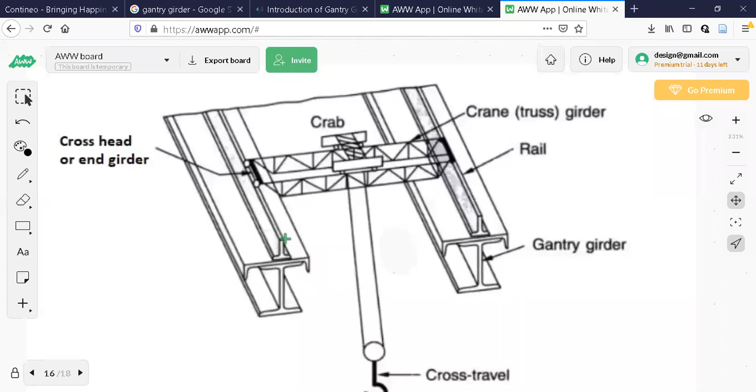Now if you see this, it looks very complicated, but as far as design is concerned, I'll take you back to that diagram. One more diagram is there. See this one. This gives a simpler way of understanding this.

Now if you see this diagram, you will understand how it works actually. You can see these two are, see one is this one, and one more is this one. There are two gantry girders like this, running in this way.

Whatever truss you are seeing, it is the crane girder, and there are two wheels for the crane girder. These are the two wheels through which the reaction from the crane girder is transferred to the gantry girder. This is a simpler way of understanding, because this diagram looks very complicated.

But actually when you go to the industry you see these gantry girders, because as you know every industry will have so many gantry girders. This looks a little complicated unless you go and see it physically. But as far as design is concerned, you can depend on this diagram to understand what is what here.

So you can see this one. Whatever rail and all I was telling you, you can see the profile. The profile of the gantry girder is one channel and one I-section. All are available in the steel tables.

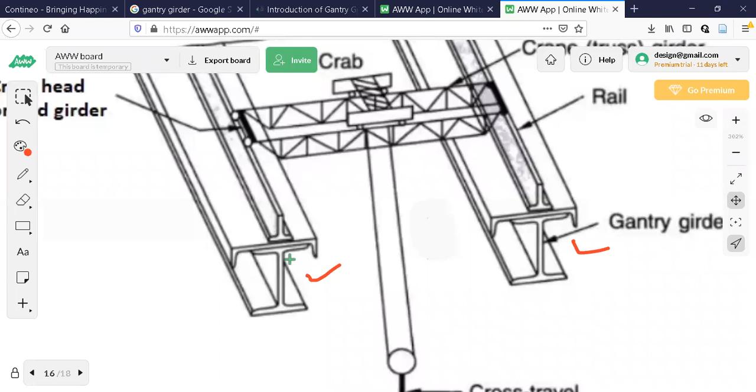Now you can see the rail. Whatever I was telling, the weight of the rail is 0.3 kilonewton per meter, and all I was discussing. That is nothing but this one. This is the rail on which...

See, on which you can see the weight of the rail is also taken, and you can see those point loads, whatever I was telling. The reaction is converted into 2 point loads. RA is equal to RA by 2, RA by 2, through these two wheels those 2 point loads are transferred.

We have to check for what position of these two wheels, because it is moving in this direction. As you can see in this diagram here, you can observe this one.

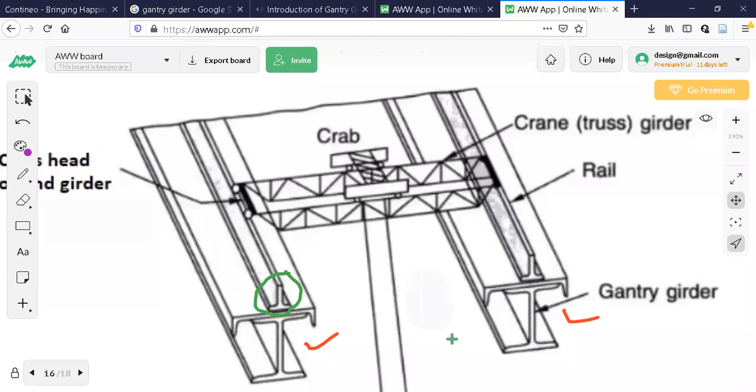You can see this diagram here. Now this crane girder is moving. You can see how it moves in this direction as well as in this direction.

And the crab, that is this one, moves like this or like this also. It can move in either direction like this.

So now what I did was find at what position of the crane girder we get maximum bending moment. That was found using the influence line diagram only. Whatever I have given, that concept is the same for every problem.

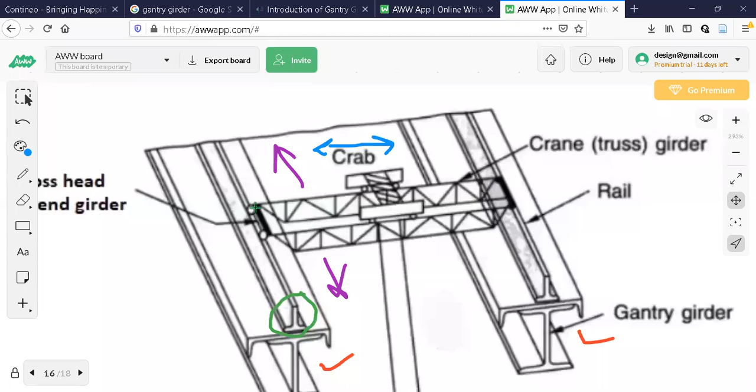And for what position of these two wheels, where I should place these two wheels of the crane girder so that I can get maximum shear force. So it is very simple.

If you have studied influence line diagrams, directly one of the loads, one of the wheels, should be directly resting on the end of the gantry girder, the starting point of the gantry girder. Then only I'll get maximum shear force.

And at some other position, which I discussed yesterday, at some other position of these 2 point loads, I am getting maximum bending moment. Since this crane girder is moving continuously, that side and this side, we have to identify a critical location where the bending moment is maximum.

For that bending moment only, I have to design the gantry girder. Again, you have to locate the critical position where shear force is maximum, because these loads are not stationary, the crane girder is moving to and fro here.

Let us go back to yesterday's class here. Observe this one here.

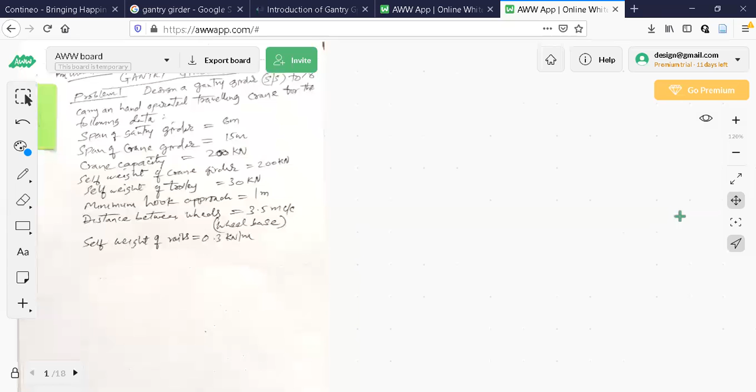I'll just go through this previous, yesterday's class. In 10 minutes, I'll try to cover this one. You can observe this here. See, this was the problem. Once again, I'll go through this.

Design a gantry girder simply supported to carry a hand operated. I already told you sometimes it is power operated, sometimes it is hand operated. I'll give you that problem also, minor changes will be there, traveling crane for the following data.

Span of gantry girder is 6 meters. Span of crane girder is 15 meter. Crane capacity is 200 kN, it can lift a maximum of 200 kilonewton. Self weight of the crane girder is 200 kN for the entire length. Total crane girder weight is 200 kN, per meter it is 200 by 15 because 15 is the span of crane girder.

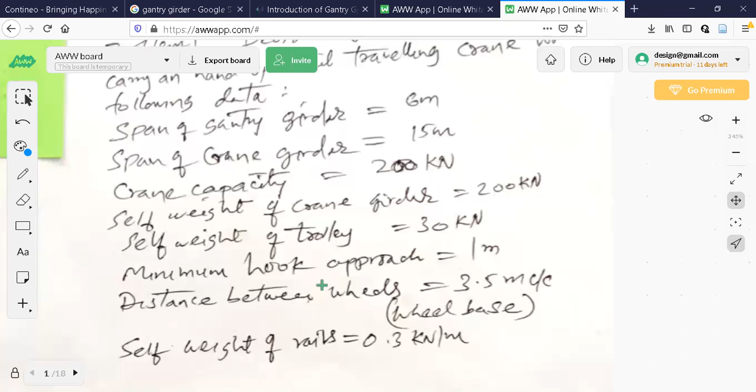Self weight of trolley is given. Then maximum hook approach is given as 1 meter. Distance between the wheels is 3.5 meter. Self weight of rails is, as I told you, 0.3 kN per meter.

Now what I have done here, see this one. Step number 1 was determine the vertical forces. Self weight of the crane girder is 200, weight per meter is 200 by 15, that is 13.3. Weight of the trolley or crab, see this, is 30 kN.

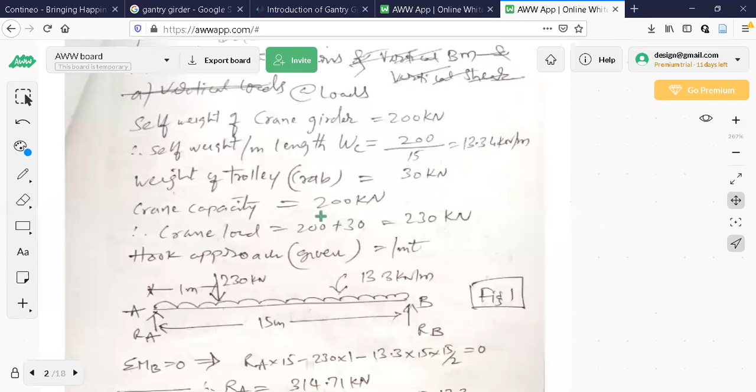Crane capacity is 200 kN. So the crane load, observe here, the load that the crane is supposed to carry is weight of the trolley plus how much weight it can lift, that is 230. In this problem both are same, don't get confused here. Now when I say crane capacity, it can lift a weight of 200 kN plus trolley weight. So the crane girder is capable of carrying this much force, that is 230 kN.

Hook approach is 1 meter. So what I will do here is I'll start this position. I'll keep hook approach here. See total load that is acting on the crane girder. See first I have to deal with crane girder, not the gantry girder here.

Step number 1 is related to crane girder. So crane girder span is shown here, 15 meter. A and B are the supports. Whatever hook approach is given, that much is taken, 1 meter here for 230 kN. It cannot cross this distance, the box will touch the wall actually. So 1 meter hook approach is given, 230 is calculated here.

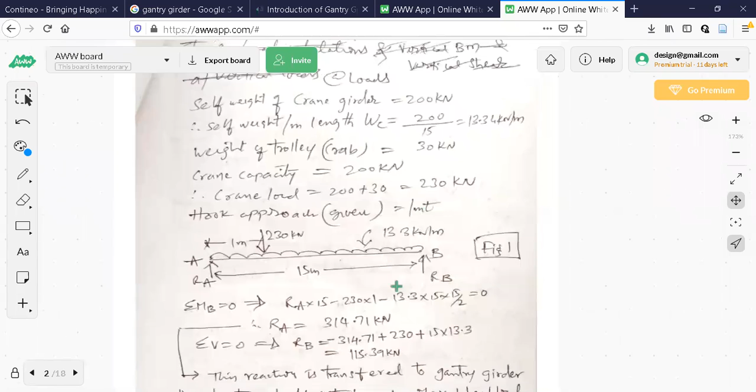Then this UDL is 200 by 15. UDL is, that is dead load of the crane girder, per meter is 13.3, total is 200.

So sigma MB is calculated. Somebody has yesterday corrected it, that is it should be 1.4. It is 1.4, but the final answer is 314 only. 4 I forgot to write here, 4 should be written here. I'll correct it and I'll send it.

Sigma V is equal to 0. RA and RB are calculated. This reaction is transferred to gantry girder through 2 wheels of trolley.

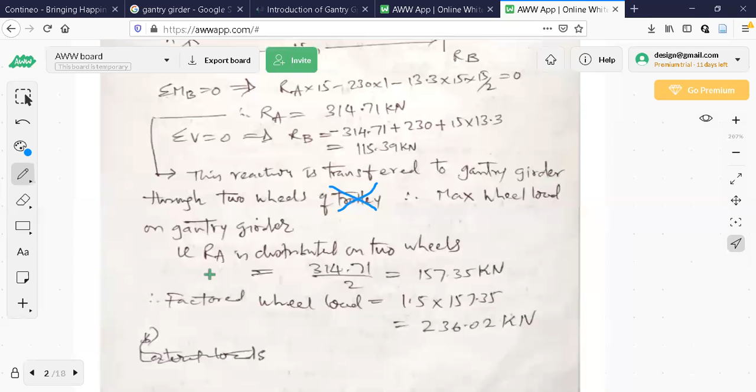Actually, I'll just correct it, there may be later confusion here. What I will do here is, two wheels of the crane girder actually. Maximum wheel load on the gantry girder, that is RA, is distributed on 2 wheels, that is reaction by 2, that is 157.35, that is again factored to 236.02. Those are the loads. This is related to crane girder.

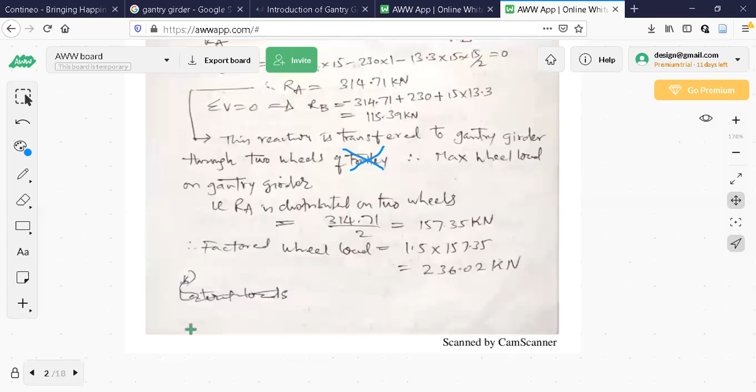Next we will start the gantry girder because I need these values, I need the 2 point loads on gantry girder. So step 2 is related to gantry girder now.

Now what I have done is there are 2 point loads. Imagine these are the two wheels of the crane girder resting on the gantry girder like this. So vertical bending moment consists of bending moment due to live loads, due to impact load, bending moment due to dead loads. So this is how it is calculated, this all approximation is there.

Now observe, maximum bending moment under second point load occurs here when centroid of loads and midpoint of span are equidistant from the second point load. I already told you this method.

Mark center point here, then divide this distance by 4 and place the first load at that distance. I already told you this placement. If you are good in influence line diagrams, fine; if not, you have to remember what I am telling right now.

So mark this one midpoint, let us say this is the midpoint, the 3-meter point here. Now you are having a distance between wheels as 3.5 meter. These are the 2 point loads to be placed anywhere on this span, so distance between them is 3.5 meter. Now what I will do, I'll divide this by 4, which is 0.875, so I'll place the first load. You can see this like this, this is 0.875.

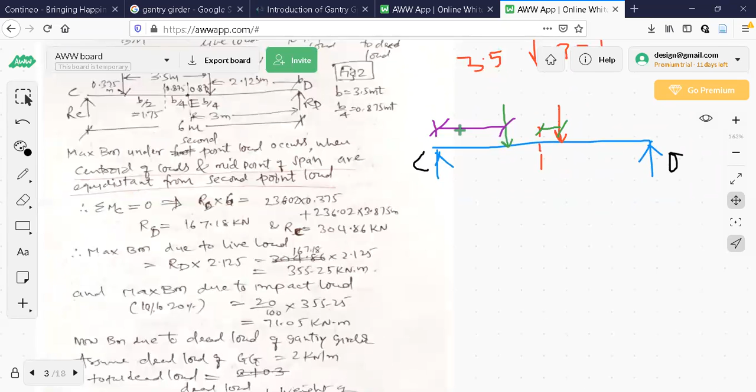You just place these 2 point loads using ILD, influence line diagram, place it like this. Now it is a strength of material problem having 2 point loads, simply supported beam with 2 point loads. In that way you find out the maximum bending moment, so it is 355.25.

Now 20% of this will be impact load because it is continuously moving. There will be impact because of continuous movement of the crane girder as well as crab or trolley. So you can see this final formula here: vertical bending moment is equal to bending moment due to live load, calculated, and 20% of that is again added.

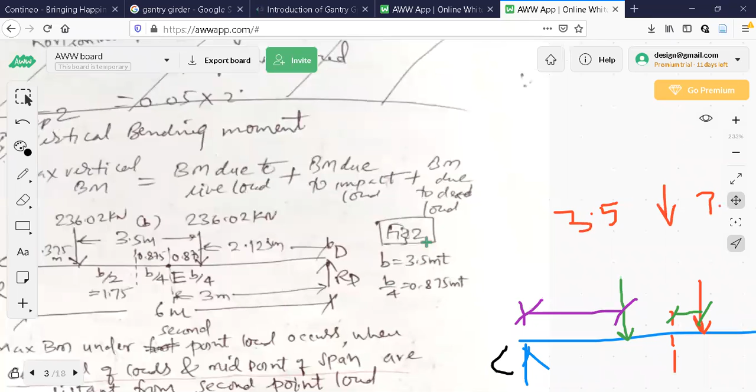Then bending moment due to dead load is calculated. Is it clear this one? Dead load: so when you want to calculate the bending moment due to dead load of gantry girder, you assume some weight as 2 kN per meter. You start with this assumption, 2 kN per meter. Usually 2 kN per meter is more than sufficient. So you have to assume this to find out bending moment due to dead load.

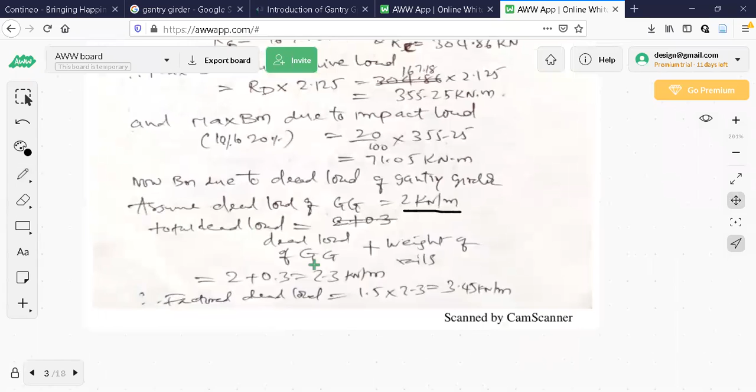Then here I have to multiply 1.5 to get factored dead load. Now you observe here, assume dead load of gantry girder to total dead load: dead load of gantry girder plus weight of the rails, which was given in the problem as 0.3, weight of the rails. I have already shown you that figure.

You can see this green colored line, this entire thing is a rail. The weight of the rail is given like that.

So finally we observe here 2 kN per meter dead load assumed, it is 2.3, factored again 1.5 into 2.3. I am going to factor the dead load of the gantry girder and dead load of the rail, 2.3 factored by 1.5.

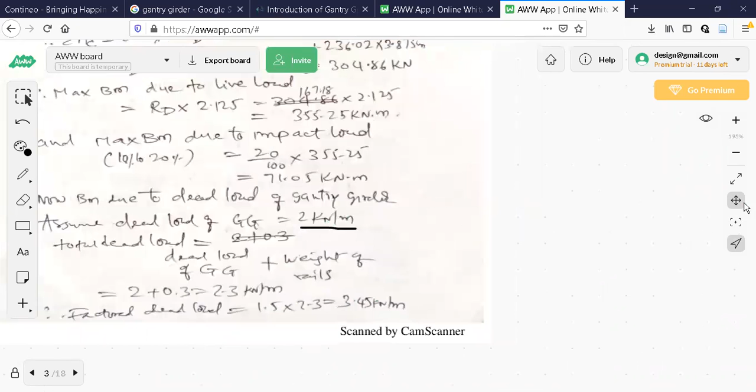That gives 3.45. So directly it is W L square by 8. W into L square by 8 is the third component. Now you can look at this main formula here.

Bending moment due to live load is calculated by placing these 2 point loads at suitable positions. Bending moment due to impact load is 20% of this first term. This is WL square by 8, where W is the factored dead load of gantry girder and rail.

So in this way, I have calculated the vertical bending moment. It is in the next page, you can see here.

Observe this: maximum factored moment due to dead load is WL square by 8, which is 3.45 - it is the factored load of gantry girder and rail. Span is 6, span of gantry girder is 6. So the value is given as 15.52.

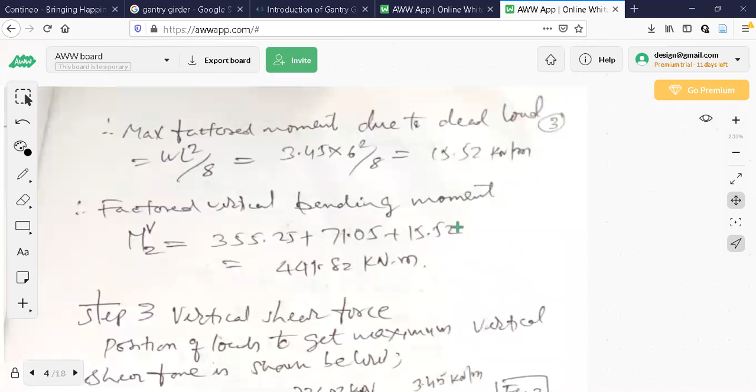So add all the three: 355.25, 20% of 355.25, and 15.52. So 441.82 is the factored vertical bending moment.

MZV, where V is for vertical moment. Now vertical shear force - there will be horizontal forces too, that is why we have to write like this. Horizontal shear force will be there, horizontal bending moment will be there. The member is subjected to horizontal forces also, not only vertical.

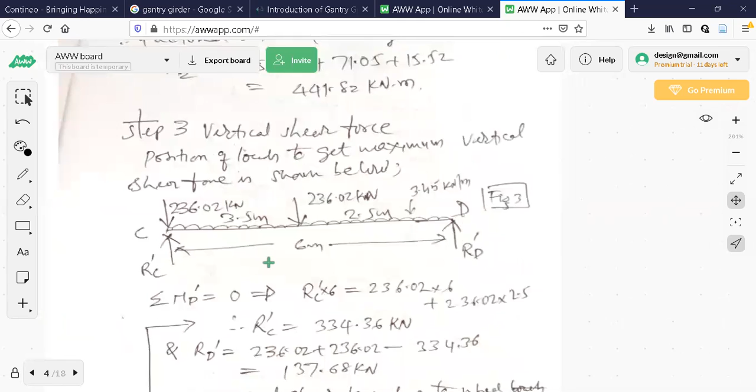So let us see that, let us start step number 3. Position of loads to get maximum vertical shear force is shown below. Directly place over this left support these 2 point loads - wheel loads are there. You just place them like this.

Again, this is the dead load as usual, 3.45 - this dead load, as I told you, includes both rail as well as gantry girder. Now you place it like this, then find out the reactions.

Now R dash C, R dash D. Why it is R dash now? Because CD reactions are calculated for another position of these 2 point loads for maximum bending moment - those are RC and RD.

Manoja, you erase it. Sir, by mistake it came.

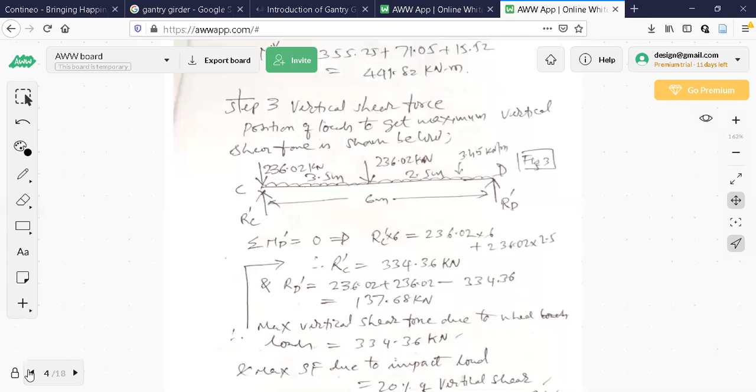Now observe here, that is, let me go to the previous page. Why it is R dash C, R dash D, to know that I'll go to this, see this.

For this position of point loads, RC and RD are calculated. For this position of point loads, again reactions are calculated. The reactions will be different because point loads are shifted now - that is why R dash D, R dash C are given.

Sigma M dash D - bending moment means sigma M dash D means you have to use algebraic sum of moments about D equal to 0. Find out the reactions R dash - it is simply only the notations that are different.

Again, one more problem of strength of materials wherein 2 point loads are there and UDL is acting on that. Like this, you find out the maximum vertical shear, and here we are going to concentrate on shear.

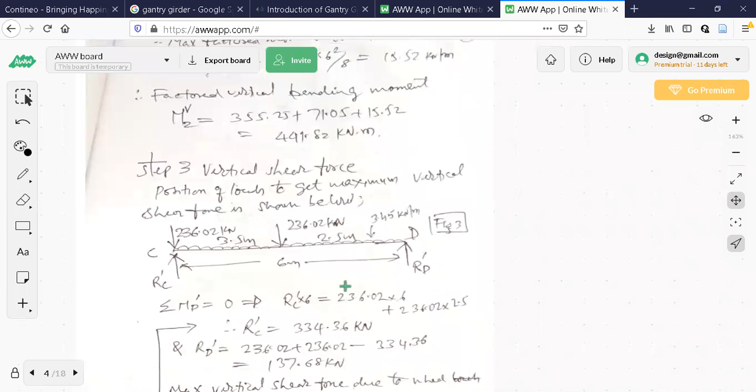Because bending moment will not be as much as 441.82 for this position of point loads - bending moment will not be equal to 441.8. My interest is only shear force here, that is why shear force is calculated.

Now observe this. Maximum vertical shear force due to wheel loads is 334.36. In this way, you find out the shear force.

So maximum SF due to impact load - there is an impact because weight is suddenly lifted, carried to some other place, and again dropped. There is a lot of horizontal movement for this gantry girder. Gantry girder is subjected to loads which are not stationary, which are moving horizontally on it constantly, continuously.

That is why something called impact has to be considered. Impact calculation is very complicated actually, but in your syllabus, for this particular 7th semester, simply 20% of 334 is taken. It's very debatable - how you arrived at 20% is after experience and after so many equations. Finally, they say just use 20% of this as impact.

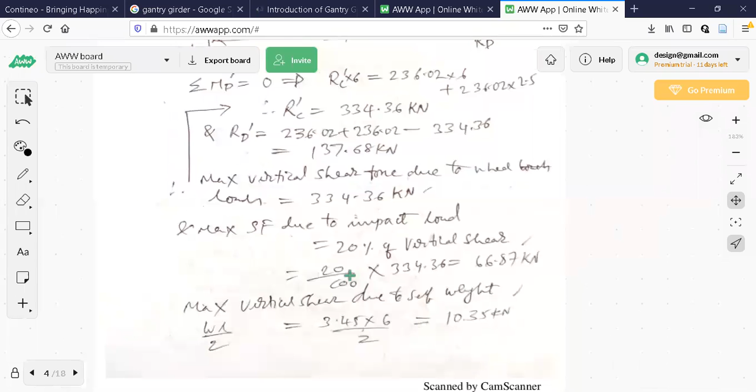So there is an impact to be considered, which is vertical again: 20 by 100 into 334 gives 66. You add this one - so maximum vertical shear force due to self weight must be calculated.

Now observe here, what I have done - just observe this. How many are there now? One is this, one is this one.

One more is 20% of 334.36. One more is 10.35, because there is a vertical shear force due to self weight, WL by 2, that is 3.45 into 6 by 2. You just add these three, you will get the maximum vertical shear force, which is there on the next page.

Okay, see this, VU superscript V. These are vertical forces related shear force, 411.58. Now let us go to the lateral forces.

You can see this diagram here, what is happening you'll understand. See this, span is again 6 meter. Forces are acting in the horizontal direction on this beam, on this gantry girder. Which are those horizontal forces and all? You will see that one.

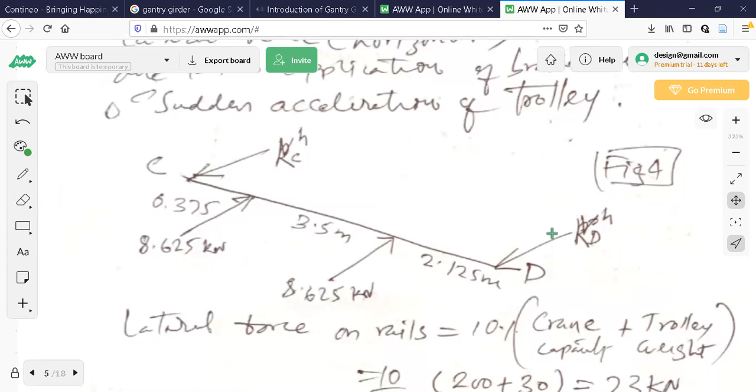Now what I have done is, again CD is the, every time I am using CD, but while calculating reactions I am going to use RC superscript H, RD superscript H, because these reactions are related to horizontal forces. That is why superscript is H.

Okay, so you can see that the span is used 3 times. Gantry girder span is used 3 times: one for maximum bending moment for a specific location of point loads, one more for maximum shear force where again the positions of point loads were shifted, and the third case is again calculating the reactions with respect to horizontal impact forces, lateral forces. You observe this one.

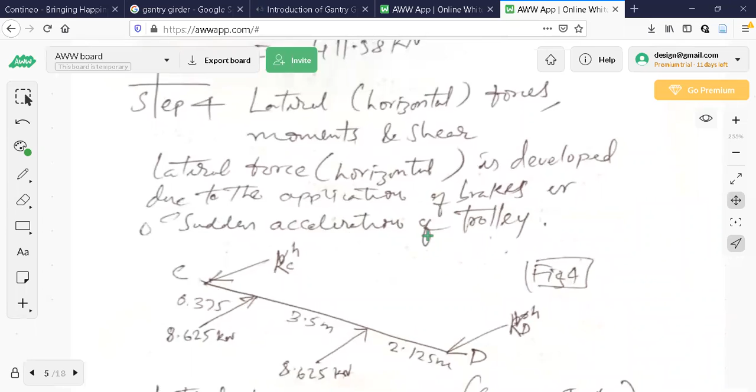Lateral forces. Lateral force is developed due to the application of brakes or sudden acceleration of the trolley. Whenever we apply a sudden brake to the trolley, or suddenly it is accelerated, there will be lateral forces produced. How to calculate this one?

Observe here, how I am getting 8.625 and all that. Now observe this. Right now, don't think too much about this, there is a separate book for how to find out lateral horizontal forces. But in your IS code, they have simplified all this.

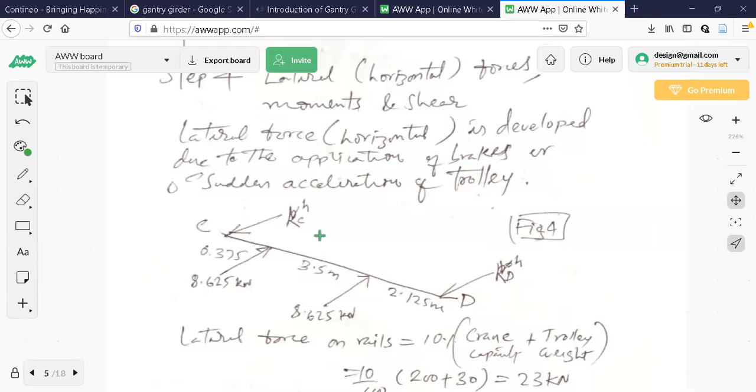A lot of complicated equations are there to find out the equivalent horizontal forces acting whenever sudden brakes are applied to the trolley or suddenly it is accelerated. Now, lateral force on the rails is, observe this one, how it is calculated. It's a very important and very simplified calculation by the code book.

You can see this, 10% of crane capacity plus trolley weight. So the crane is capable of lifting 200 kN, and weight of the trolley or the crab itself is 30 kN. You add these, 230, 10% of that is 23.

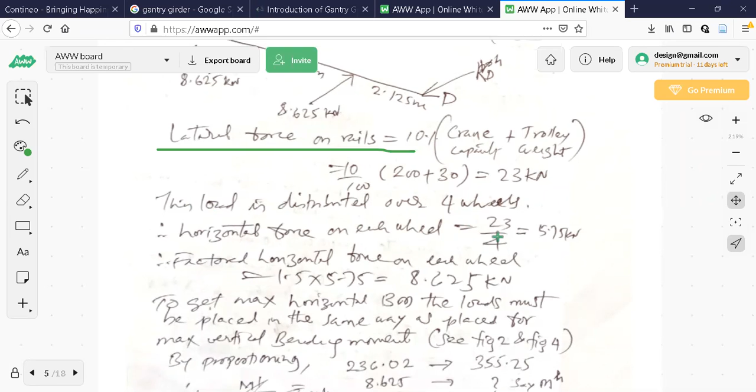This load is distributed over 4 wheels. Now these 4 wheels are related to the trolley. Those 2 wheels earlier were related to the crane girder wheels; now I am looking at 4 wheels of the trolley. So that is why horizontal force on each wheel: there are 4 wheels for the trolley, each wheel is subjected to horizontal force of 23 by 4, which is 5.75 kilonewton.

Again, you factor it, it is 8.625. So you can see this 8.625, 8.625. Again, the distance between these two is also 3.5 meter. Are you getting this point?

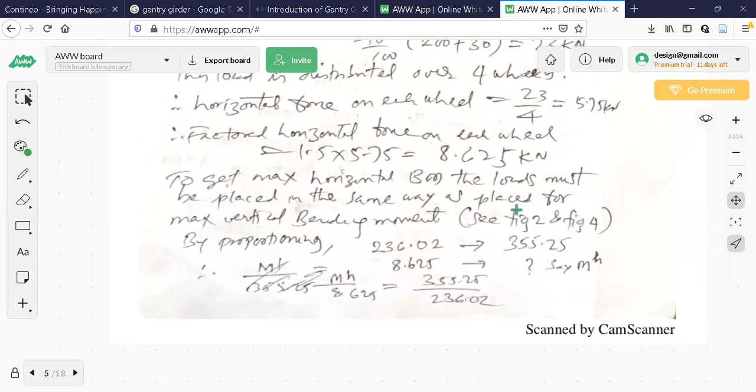So 8.625 kilonewton. To get maximum horizontal bending moment, loads must be placed in the same way as placed for maximum vertical bending moment. See figure 2 and figure 4. What it means in this case is, just read this one: to get maximum horizontal...

My job here is where I should place these 2 point loads. The distance between them cannot be altered, but where I should place them in a span of 6 meter to get maximum bending moment. For that, the explanation is given here, you can see this.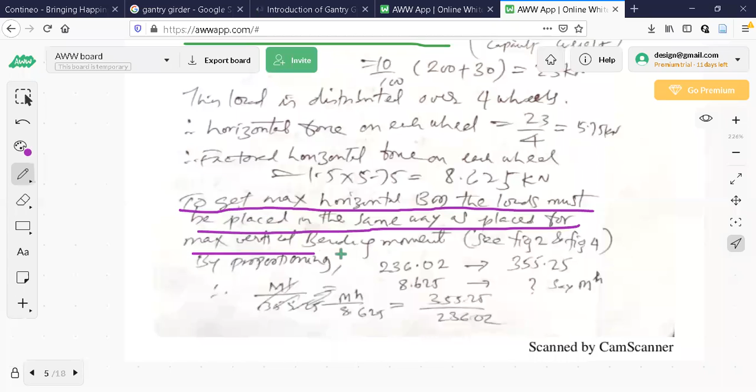To get maximum horizontal bending moment, the loads must be placed in the same way as placed for the maximum bending moment, by proportioning. How it is, you just observe here.

How it is. My job is to find out M raised to H, that is maximum horizontal bending moment, bending moment due to horizontal forces. For that, I need to place the loads at a specific location and find out the bending moment. But here it is more simplified now. Now observe this.

How simply it is done here. You don't have to do any calculation here. If you know this proportioning, I'll show you. Look at these particular values, try to understand them so that you don't have to actually calculate the reaction, bending moment and all. Directly it is available now.

236.02 is one of the reactions in that problem. In that case, 2 point loads were there. So in case of vertical, okay, I'll do like this.

Observe here, this green line, whatever values you are seeing here, this is related to vertical bending moment. So when 2 point loads were there, each of 236.02, I got the bending moment 355.25. When 2 point loads of 8.625 are there, how much bending moment will I get?

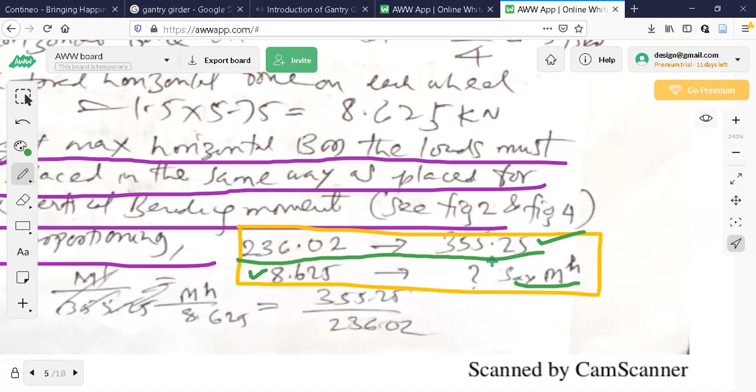It is simply a ratio and proportion type of problem. So what you should understand is when there were 2 point loads of 236.02, I got a moment of 355.25. When 2 point loads of 8.625 are acting, how much is the bending moment? You can see this 8.625.

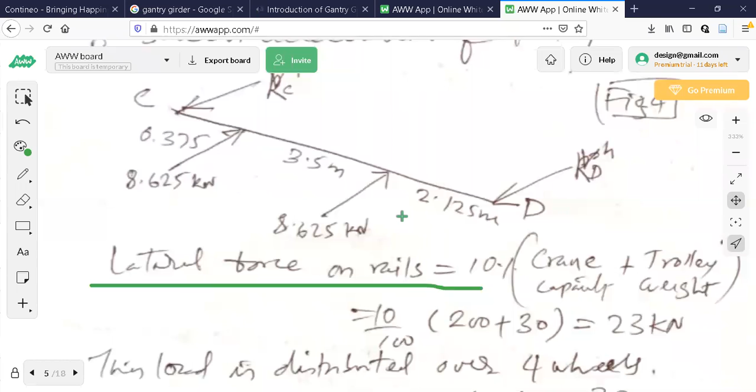This is one method, a short method. If you want to use ILD, influence line diagram, and place them at specific locations, the way I solved that vertical bending moment case, by placing the bending moment at 3/4, at the midpoint and all, you can do that. But it takes time and is complicated.

Any questions are there? Any questions are there here?

See, now 236.02 to 355.25, what are these two numbers? Then only you'll understand 8.625 and M raised to h. As I told you, in this step, what I'm doing, this step number is 4. In step number 4, I'm trying to find out the maximum horizontal bending moment.

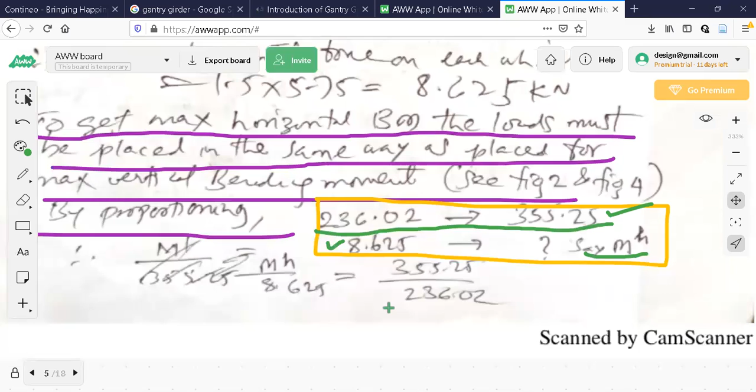Now, if you know what is there in this yellow color box, what is that? 236.02 giving me 355.25 moment. Similarly, if I place 8.625, 2 point loads, how much bending moment will I get? So simply use this ratio: mh by 8.625 is equal to 355.25 by 236.02. From this, find out mh.

Simplest way is this. Any questions here? Any questions regarding these values? I already told you there are two ways of finding this.

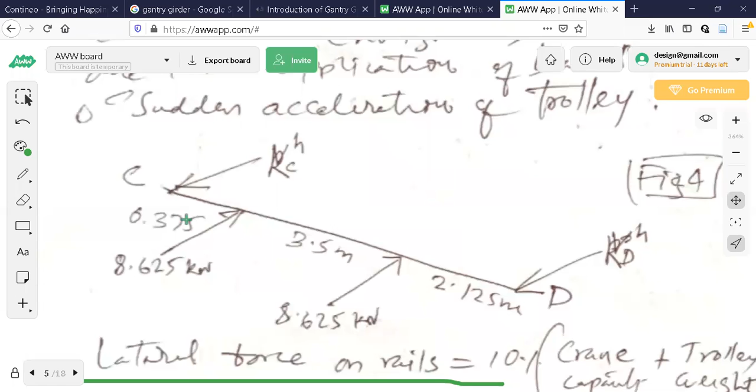See, look at this diagram now. Horizontal forces are acting. Now our job is where I should place these two horizontal forces to get maximum horizontal bending moment. For that, I should go back to analysis of determinate structures, study influence line diagrams, then place these two at a specific location so that I can get the maximum horizontal bending moment.

That is one way. Second is very simple, easier than that. This simple box you see here, green yellow color box, 236.02 is nothing but 2 point loads, one of the 2 point loads. If I place this one, I am getting 355.25 maximum bending moment. If I place 8.625, how much bending moment will I get?

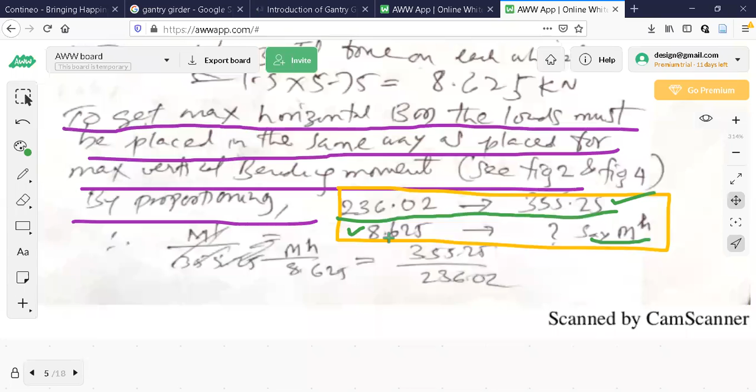So like this, mh by 8.625 is equal to 355.25 by 236.02. So this divided by this, 355.25 divided by 236.02 must be equal to mh divided by 8.625. Like this, you can easily find the mh value. Mh is the maximum horizontal bending moment.

So this is a simple method I'm giving. Otherwise, you'd go back to the influence line diagram, place them again and find bending moment, which is not advisable here. So on the next page, I'll get you the value of mh. So mh is 12.98 kilonewton meter. Similarly, maximum horizontal shear force for two vertical point loads of 236.02, the maximum shear force was 334.36.

If you want, I'll take you back to these particular calculations. If you are confused, I can show you that page where it is done. Again, observe this one.

Maximum horizontal shear force I have to calculate. I don't have to shift the loads and all, from the previous case only I can get it. So for 236.02, 2 point loads, if I place them one on the support, one at some other distance of 3.5 meters, the maximum shear force I got was 334.36.

Now if I place 2 point loads of 8.625, what will be the maximum horizontal shear force? Again, same formula, same ratio and proportioning. You can see, so 12.21. I got two values now: one is 12.98 maximum bending moment, one more is 12.21 maximum shear force.

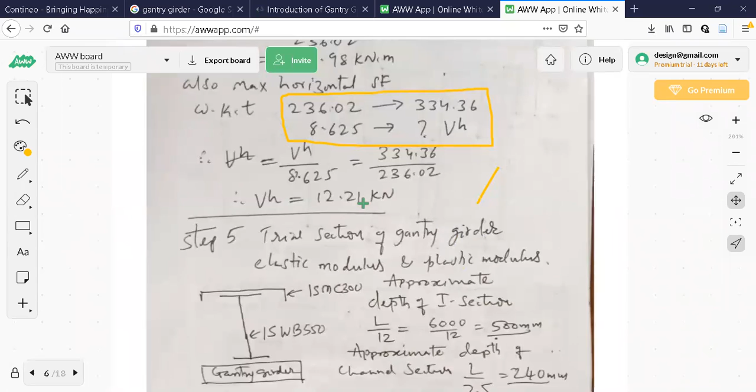Now, trial section step 5. Your section starts now. Trial section is selected like this. You can see the profile. One channel and one I section are selected.

How am I able to select ISMC 300, ISWB 550? ISWB means it is an I section. ISMC 300. Remember, steel structure design is always trial and error. Based on past experience only, one has to select the sections, but some thumb rules are also there for you. Now you can see here.

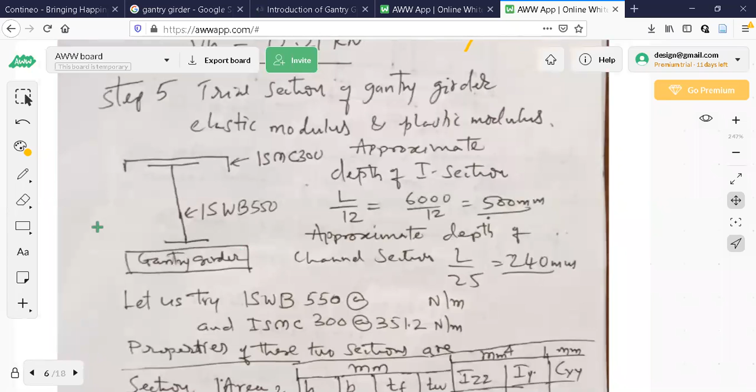Now let us see this standard profile of a gantry girder. See this one, trial section of gantry girder. Elastic modulus and plastic modulus must be calculated.

Now step 5 is related to trying a section. Let us try one profile and find out elastic and plastic modulus for that profile. How have I decided? Observe this: L by 12. Approximate depth of I section is L by 12. That is 6000, since span is 6 meters. So 6000 by 12 equals 500 mm.

Approximate depth of channel section is L by 25. So for this height of I section, it is L by 12, and for this one it is L by 25, approximately. In that way you have to check in the steel tables.

So what I will do, this is L by 25 - okay, I'll change this color. So red is L by 25, I'll check. This is L by 12, I'll check. So horizontal is L by this one.

See, L by 12 is 500. I have to search for anything more than 500. That's why I have taken 550. 500 I could also try, but I just tried with extra instead of exactly 500, since I wanted to be on the safer side. 6000 by 12 gives me 500, but I have selected ISWB 550 - 50 mm extra I have selected.

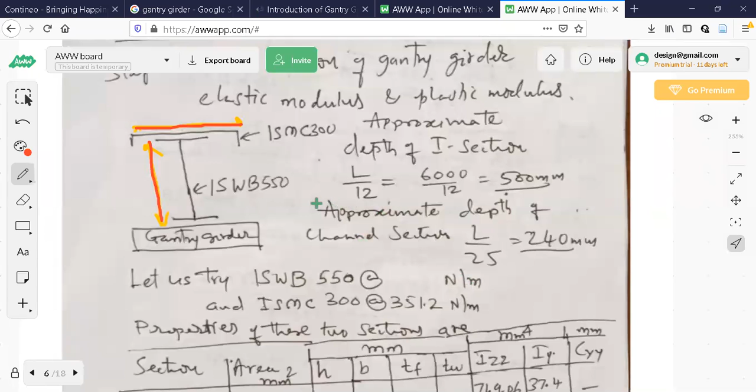Approximate depth of channel section, horizontal red line, L by 25, is 240. What I have done is select ISMC 300 since there is no 240 size. These are approximate thumb rules to start with. You may have to change the section later also.

In the examination, if the section has to be revised, you don't have to proceed further and you will still get full marks. For that, I'll tell you what to do. For example, somewhere it fails, but still you want full marks because you know you can solve it.

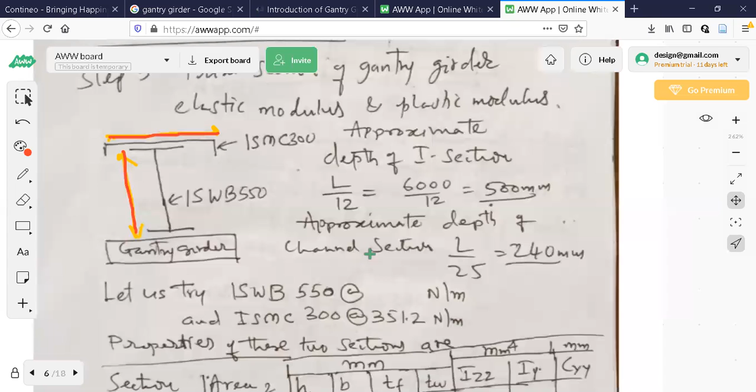You have to prove that you know how to solve it, but you have to revise the sizes of channel and I sections. You just have to write one sentence there, stating that the cross sections need to be revised. If you write that sentence, the examiner has to give you full marks, even if you don't do anything related to the revised profile - because the examiner should be convinced that the student knows how to solve this problem with a revised section. Normally, that is what is followed in VTU.

Now observe this. Let us try ISWB 550, ISMC 300. Weights are given, I have just got this weight - I forgot to write it. Here, see, ISWB 550 is there, but no weight, I forgot, I'll check it later. I have not written the weight here. Only thing is ISWB 550, ISMC 300 are taken.

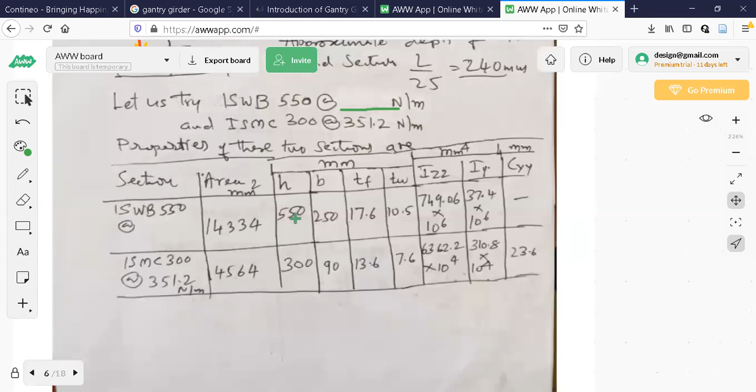Then you tabulate the values here - tabulate the geometrical properties, see this. Section ISWB 550, area is 14,334 mm square. H is 550, since it is ISWB 550, H has to be 550. Width is 250, I think you can follow all this. Then TF, flange thickness, is 17.6. Web thickness is 10.5. IZZ is important for us, then IY - CYY is not important. What is CYY? I'll show you in the diagram.

For I section, it is not required for us.

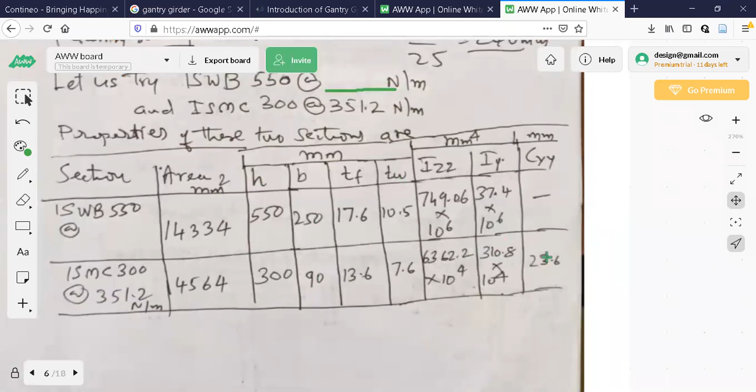CY is what we require here. CYY, that I'll show you with respect to ISMC. I'll show you the diagram. 23.6 mm. So you need to tabulate all this first. This is your...

This is your step number 5. Trial section is taken. The profile remains same every time when you solve this gantry girder for your syllabus, because this profile makes it easy for you to place one rail here. Rail can be easily placed, and it satisfies other requirements which you are going to learn here.

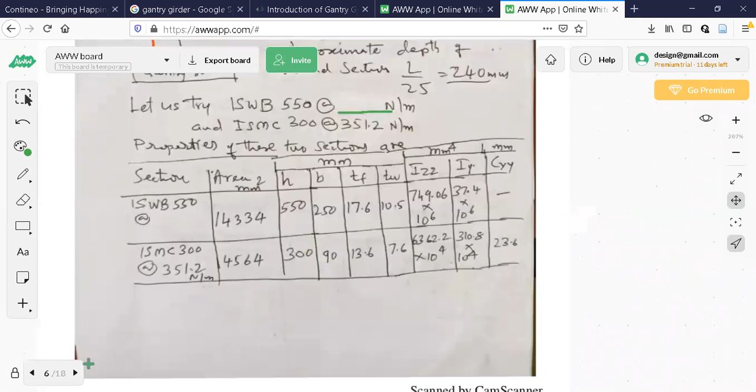What are those other requirements it is satisfying? Now let us go to the next page. Observe this, here still we are in step number 5 only. Profile is finalized and I'm going to find out elastic modulus and plastic modulus of the section. I think I have done it once anyway, just observe. Equal area axis is already done an hour back. Same problem I have taken, same dimensions.

Now you see this, all the dimensions after noting that from the table we created. From that table, all these are written now: 250, 550 inside to inside. Total height of the I section is 550. Channel is 300 by 90. All those thicknesses are shown here. It becomes a first year problem now: find out the centroid, this, that.

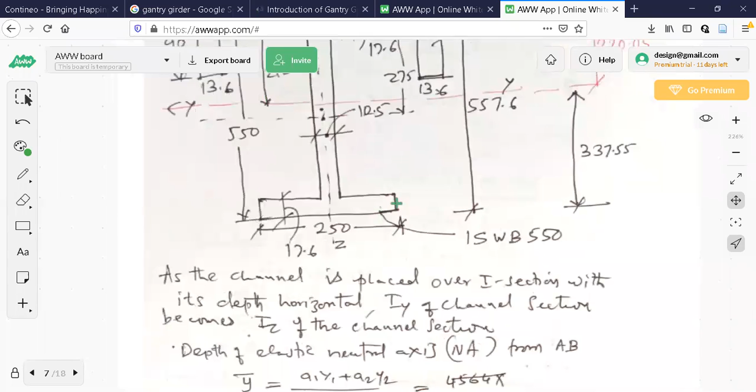Now observe here. So what we should do is first clearly write all those dimensions, thickness of flange, everything should be clearly shown: 13.6 this side, 13.6, 10.5. 17.6 is the thickness, you can see 17.6 is the thickness of the flange. All this should be clearly shown.

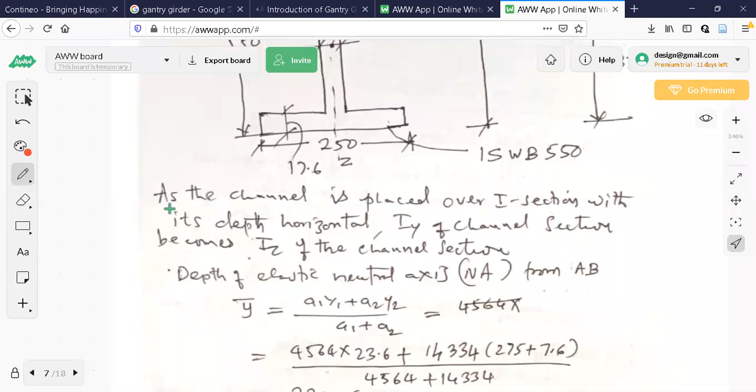Write this as AB, top line as AB, like this. This is a reference line, as the channel is placed over I section with its depth horizontal. Now one important observation here is how to read the values, how you are going to read the values. The observation is like this: channel is placed over I section with its depth horizontal.

What it means here is whatever steel tables we are getting, those values of IY and IZ - if you see the steel tables, they have given with respect to this position of channel section. With respect to this orientation, steel table has given you Iy, Iz values. But the orientation in this problem is like this.

So what is the change here? As the channel is placed over I section with its depth horizontal, IY of the channel section becomes IZ of the channel section. This statement is very important here. Don't get confused in the steel table. If you open the steel table and check channel section, the orientation is like this - in this way the channel section is oriented. So the values will interchange now. Values of moment of inertia will interchange because of the changed orientation. So IY of the channel section becomes IZ of the channel section.

I'll show you this one here. Observe this, this is channel section. Channel section is here. Now this value becomes IZ, even though it is written under IY. See, this is meant for orientation of this. When the channel is kept like this it is IY. If the channel is kept like this, it is IZ now. Whatever is shown, it is IZ. That is what it means actually, because of the orientation change.

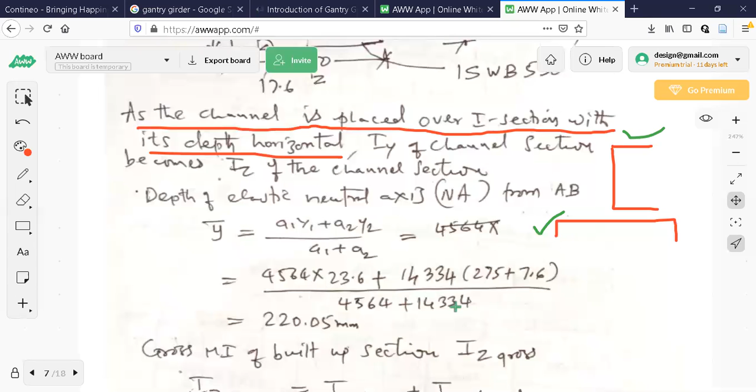So depth of elastic neutral axis has to be calculated now. Depth of elastic neutral axis, A1 Y1 plus A2 Y2 by A1 plus A2. Usually first year students they are asking why we should study this centroid and all. Even at 7th semester till you complete engineering, these will be there. So Y bar is A1 Y1 plus A2 Y2 by A1 plus A2. So you substitute all this.

No, it is very simple actually. Observe this one, A1 Y1. You have to go back to the table and simply write these two numbers there. See this one here, okay I'll show you this. You are just substituting, you are not doing anything here. You are using the calculator, that's all. See this.

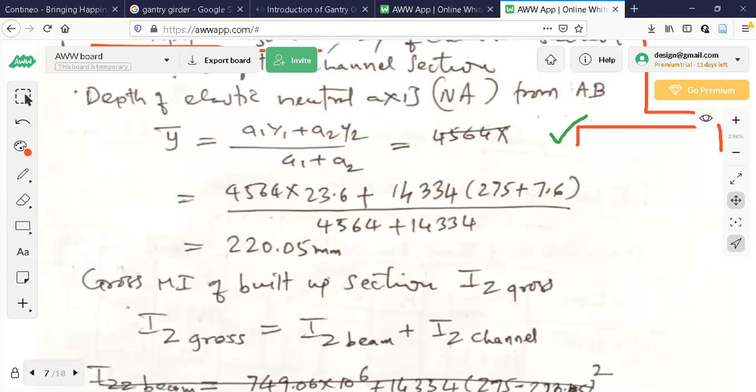4564 into 23.6, where is that one? Just I am putting A1 Y1. This is A1, this is 23.6 as Y1. How - I'll show you the diagram also. Next is A2 Y2. A2 is with respect to I section: 275 plus 7.6, divided by A1 plus A2. This is what is Y bar. Observe here.

Observe this diagram. I'll show you now how I'm getting, how to understand these values here, because you're just using your calculator now. This is your channel. This is your I section. Now what I have done here is, what is 4564 into 23.6? Observe this, what is that?

This dotted line is the position of centroid of the channel section, which is CYY. This distance is CYY, 23.6. So this is 23.6.

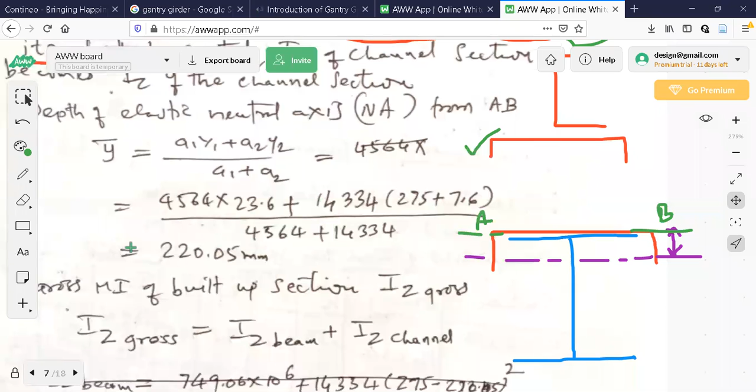Then 14,334, area of the I section. Now let us see what is Y2. Y1 is CYY, is nothing but Y1. This is, you can see in your steel table, this is nothing but CYY, that is 23.6.

Now let us see how to find out the A2 Y2 of I section. So A2 is area of the entire I section, 14,334. Now where is the centroid here? Where is the centroid? Centroid of the I section, where it will be? It is at the midpoint of the I section, somewhere here.

This is the midpoint of the I section, but it has to be measured from the top edge of the channel section. This is Y2, you can see this is Y2. This is Y1, CYY is Y1. Now you get Y2 here. How to get Y2? Already in the steel table, you know this distance.

For I section, you know this distance, which is 275. 550 by 2 is how much? That is 275. You add the thickness of the flange of the web of the channel section.

Are you getting this point? What I have done here is, 14,334 is the total area of the I section as given in the steel table, I am just writing it. No calculation is there. 275 is 550 by 2. Total height is 550. It is ISWB 550, means this 275 is 550 by 2, 275.

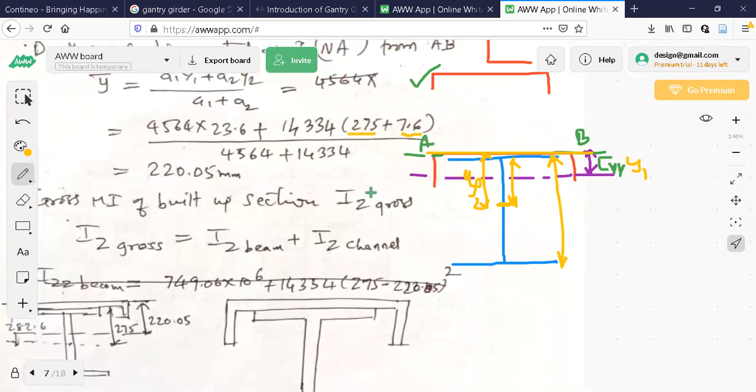I got the centroid of the profile somewhere here. So this centroid of the profile will be 275. I have drawn this figure here. See. Okay. Is it clear, this one?

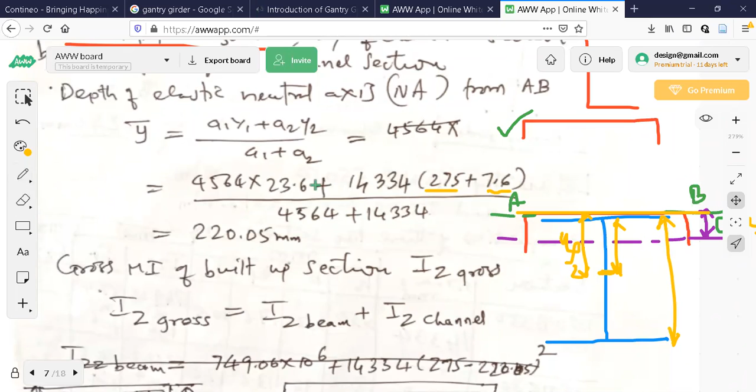Any questions here? How to get this? See, it is not like the way you are calculating in first year, where again you divide them into rectangles. This way you will spend 1 hour for this calculation only. If you don't know how to do it fast, don't attempt this question in the exam. If you don't know how to calculate y bar, better to try some other example in the examination. Otherwise, it will be a waste of time here.

This calculation you should take maximum 5 minutes, maximum. If the same problem is given to a first year student, he will not be using steel table and all, he has to divide them into rectangles and calculate it. He will take 20 minutes. That is valid, for that fellow it is valid. For you people, you have to use steel table, all values are available. Only here and there, Y1 and Y2, you should know what those are. Once you know what Y1 and Y2 are, it is simply 1 minute or 3 minute work.

So gross MI of a built-up section. Now observe here, IZ gross. Now if you look at the steel table, observe this. With reference to this type of profile only, IZ is given. That is why I told you, in this case, I have to use these two profiles, one is this, one more is this, because it is tilted. So see this IZ gross, IZ of the beam section, IZ of the channel section. So I have to just refer the steel table and add these two numbers.

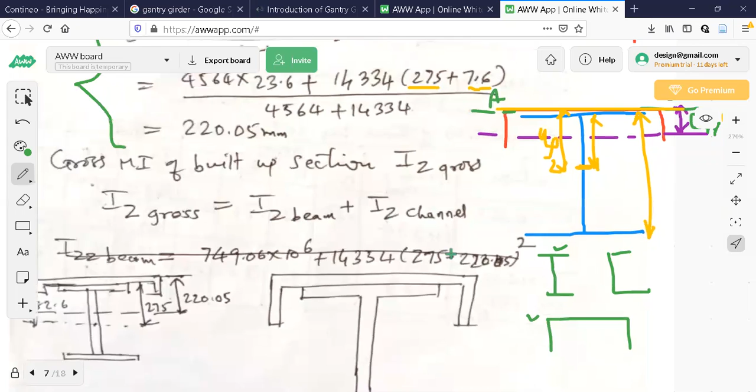Let us see that one. Okay, now you can see this diagram. It gives you the clear picture now.

Now observe here. This centroid line I'll show you with respect to whatever values I have calculated just now. I have explained, just observe this. Now this line is what I have calculated just now. This line, 275 plus 7.6, that is a centroid of the I section. It is actually I section from the top line AB. This is the top line AB, here.

Okay, just try to understand the diagram first. You worry about other things later on. Look at the diagram, try to understand what is there. Y max is 337.55.

Okay, now you look at this particular one here, 282.6. Center of the entire section, 282.6. Okay, is it clear this one? Okay, one second, you just observe this.

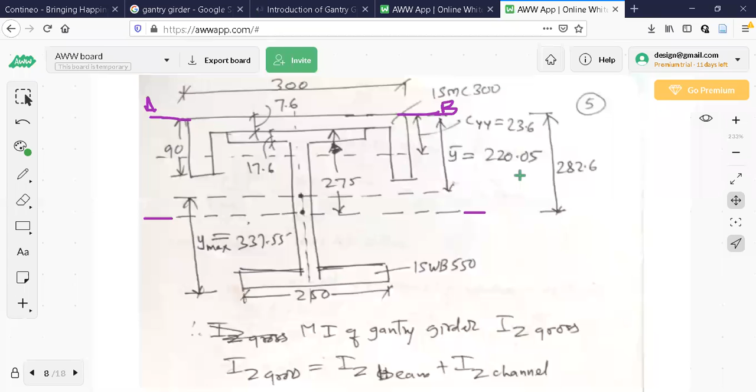Just observe this diagram. Okay, now you look at this one here. I'll show you some number here, then I'll take you back. See this one.

Y bar is 220.05 from the top reference line AB. That is Y bar. Then look at this, 220.05, same number is there. Okay.

Then 282.6. What is this? I'll tell you now, what is this. 282.6, there are two axis lines here. Two horizontal axis lines are there.

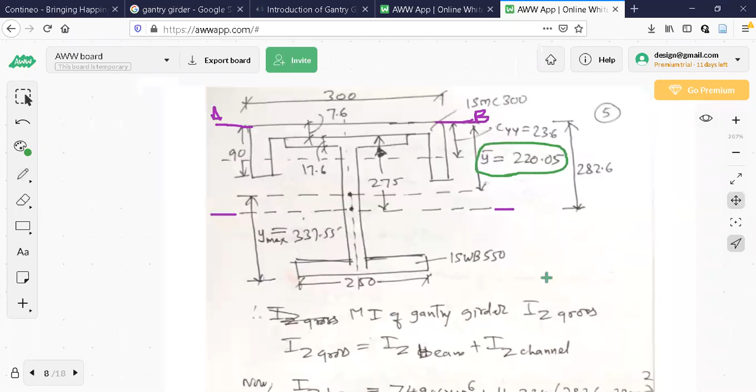So this is, after seeing this diagram, after observing, Y max is 337.55. Now observe this one here. What is 337.55? It is total height of the profile minus Y bar. You can see this line Y max. See, because I calculated Y bar from the top edge, in total depth I subtracted 220.05, I got Y max. Because why I'm writing Y max? Because this value is more than this, 337.55 is more than this. So out of these two, whichever is more, I should have considered.

So I got these two numbers. If you add Y bar plus Y max, it is the total depth of the profile. Total depth of the gantry girder, including the thickness of channel as well as everything, total depth it is. So 220 plus 337.55. Okay, presently I don't know what is 282.6. I'll tell you that one, it comes in the later calculations.

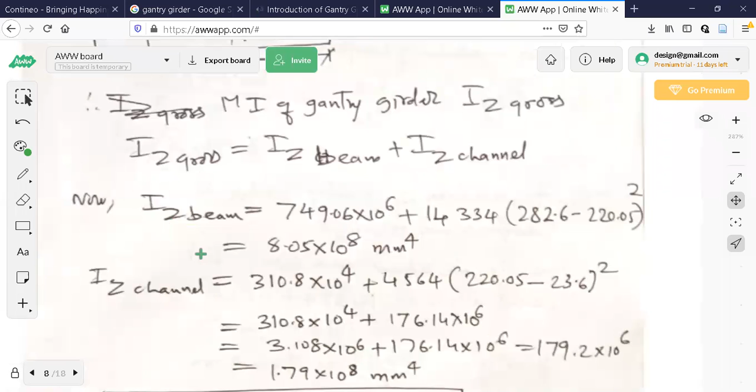Observe this. IZ gross, IZ beam plus IZ channel. How to find out this one? Because I need, see, I need an IZ value. You will come to know why it is required. IZ gross means total moment of inertia of the profile I need about Z axis.

Okay, Z axis. Now what is Z axis? I will show you. In steel structures, what is Z axis? I'll draw this figure somewhere here now. What is Z axis? I think you know this one, but you will then see this.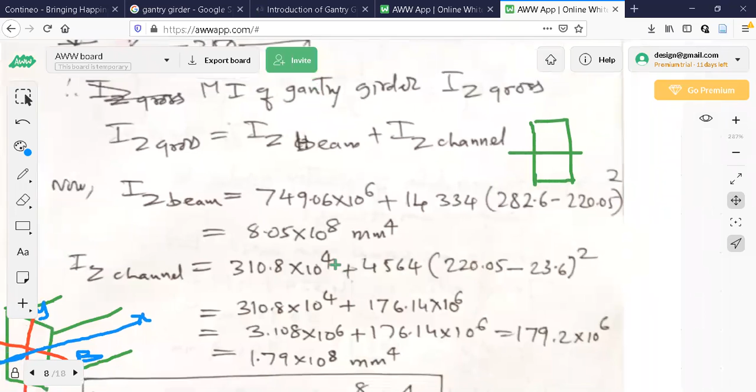IZ gross, I will explain. See, this is all previous knowledge only, nothing new I'm telling here. All previous strength of material only we are extending, that's all. So IZ beam you observe here.

My job is to find out the moment of inertia about Z axis of the entire profile. Okay, how it is done. Now, 749.06 into 10 raised to 6 plus some other value into this. That is Ig plus AH square, parallel axis theorem.

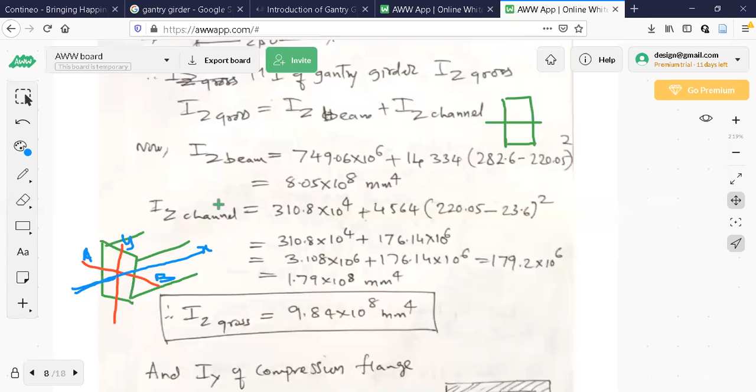Ig plus AH square. Now let us see. First of all, try to understand. I am trying to find out moment of inertia about X axis only as far as strength of material is concerned. Okay, Ix only, it is from the nomenclature of strength of material. Now let us see here.

IZ of entire profile. I'll draw this figure again. See this one. You can see this. Simply what you should understand is how to find the moment of inertia of this section, which has channel and I sections, how to do it using steel tables.

It will be very fast. So 749.06 plus this. Now observe this. I'll go back to that table and see this. These two values, I'll go back to the table where those are.

ISWB, 749.06 into 10 raised to 6. Okay, what is this? IZ of I section, which is normally placed as per the steel table only, it is oriented. So no question of changing anything here. That is, it is like this only. So IZ is 749.06 into 10 raised to 6.

See this. 749.06 into 10 raised to 6. That is directly IZ of the entire profile is IZ of I section plus IZ of channel section about the centroid of the entire profile. Now I'll show one more line here. I'll show the centroid of the entire profile is somewhere here.

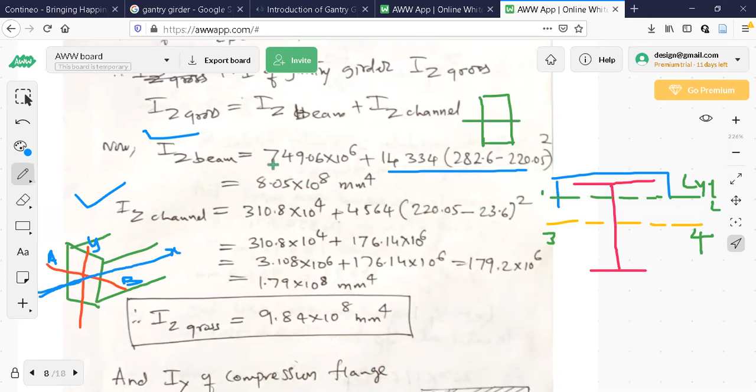So what I have done here is initially I have calculated IZ of I section, then IZ of channel section, then I have added them. See this, IZ of B means I section. So IG plus AH square. This is IG plus A of I section into this distance, 226, 282.6 minus 220.05. So here the 23.6 term is coming actually in this case.

Here it is. So AH square, A is area of the I section, H. Can you understand what is this H? Can you tell me what is this H? I'm telling you, IG plus AH square. If anybody has understood, you can tell me what is H, how I got it.

For example, this one, look at this, how I got this one. I'm telling you it is simple parallel axis theorem, IG plus AH square. Can anybody tell me what is this H, how I got it? If you don't know, I'll go back to first year and again explain what is what here. If you know it, you can tell. Otherwise, I'll explain that also, which was there in first year actually.

Okay, now I will remove this diagram. For the time being, I'll remove this. Okay, this is removed. Okay, now see this one. Only I'm trying to explain again and again IZ beam only. IZ beam is, you remove the channel section and look at only beam section, I section.

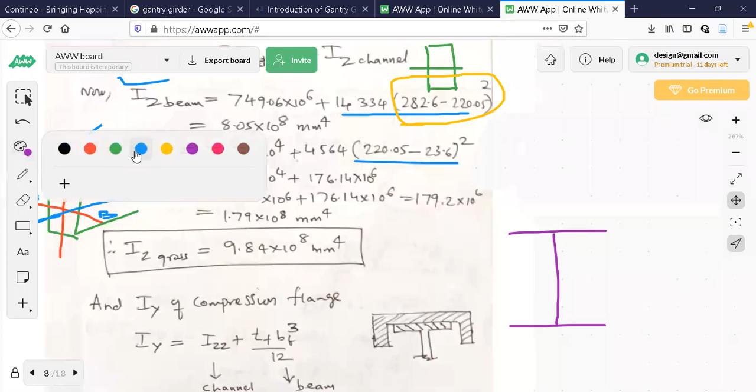Somebody ask her to mute it. So this one, see this is two lines, 220.05 minus 23.6. What are these two lines?

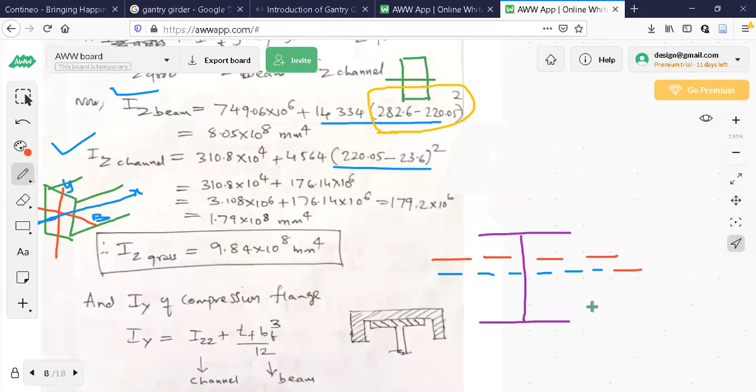Okay, are you getting this point? What I have done here, this is H. Now observe here how I use parallel axis theorem, this is Ig.

I'm just stuck in Iz for the last 10 minutes. I'm stuck in that, try to understand. Iz, see this, I'm trying to explain this one. It is all there in first year, but again.

749.06 into 10 raised to 6, Ig plus AH square. A is area of the entire I section. What is H? I was asking. This is H, this is H. Now you tell me what is this. I'm telling you this is H. So this H is, that is 282.6 minus 220.05 is H, small h, as per your strength of material formula. This H is the distance between two parallel lines.

Which are those two parallel lines? One line is centroid of the entire profile including channel section. One more line is centroid of only I section. This is what is 282.6 minus 220.05. So I'll repeat this one here, observe.

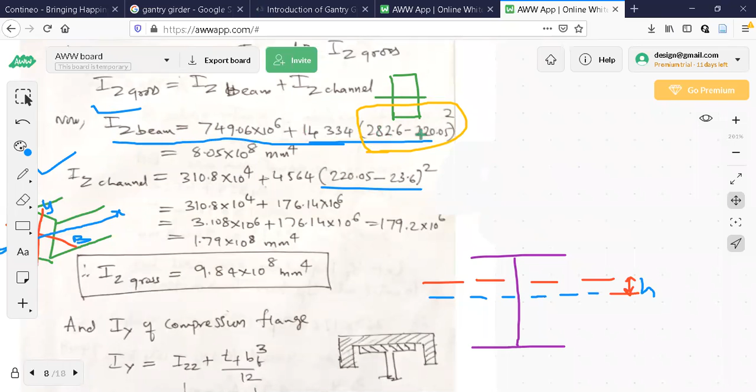Ig is there in the steel table, then area is there in the steel table, area of I section. Everything Iz, everything is related to I section only here. This line is related to only I section. Now area is there in the steel table. These two values we have calculated in the previous steps, 282.6 and 220.05 are calculated.

What are these two values? These two values I have shown in terms of two horizontal lines here. One line is related to centroid of the I section. One more line is related to centroid of the entire profile including the channel section. So these are the two lines. One line, as I told you, is centroid of the whole section including channel. One is centroid of only I section. So these two are the values here.

282.6, this is the position of this one, minus 220.05. These are the difference. Now H is this distance, that is H. So in this way you calculate Iz. Any questions here?

Now Iz channel, I have to add these two. After this I am going to stop it. Now see this, I section is completed. Now see this, I want the moment of inertia of this.

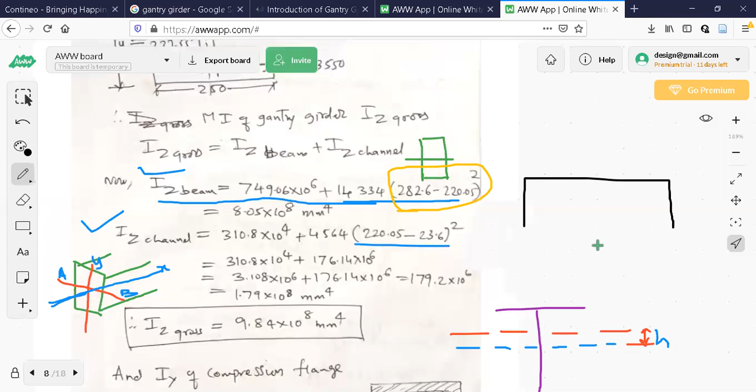Observe, channel section 310.8 into 10 raised to 4. What is this? What is this one? 310.8 into 10 raised to 4 is, I'll take you to the table again. 310.8 into 10 raised to 4.

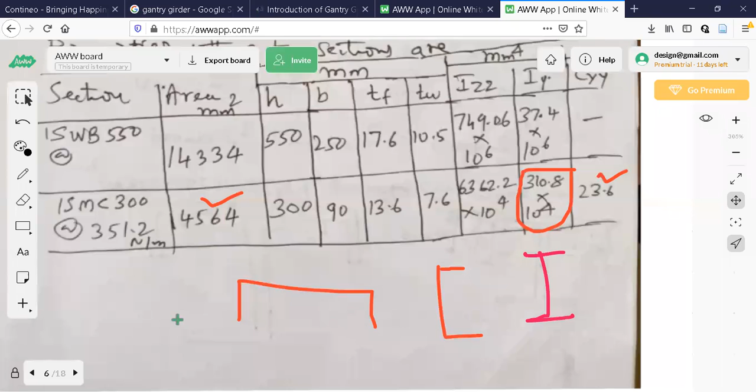Remember, you should use IY here. Don't use this value because these two are reversed now, because of the orientation is like this. Because of this, you should use IY even though I'm calculating IZ because of this type of orientation, we have to interchange those two numbers. Now that value is added now, so 310.8 into 10 raised to 4. So what is important here is this value is IY in the steel table.

IY of the channel, it is 310.8 into 10 raised to 4 plus area of the channel and H square, IG plus AH square. So A is area of the channel, H is again, see this, what is this H? I'll show you, observe this. What is H? Again I will define, observe this. With reference to channel, I am going to define this H.

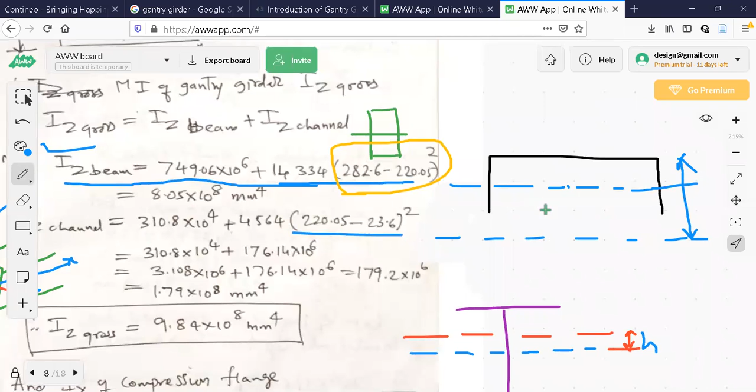So somewhere here I'll draw this line, somewhere here I'll draw this line here. This is 220.05, entire centroid of the entire section is 220.05. Centroid of this channel is here, channel is here 23.6. So I want this distance as H square. So channel section is 310.8 into 10 raised to 4 IG, A is 4564, H is this distance between two parallel lines.

One line is with reference to the centroid of the entire section, which is 220.05 from the top. So this line, whatever I have shown here, I'll call it as AB. What is this AB? AB line is centroid of the entire section, CD is centroid of the channel section. Difference between these two is H, so it is 220.05 minus 23.6, I'll get this H value. So in this way we have to calculate channel section and I section IZ values, just add them. Okay.

This is what is 9.84 into 10 raised to 8. You have to go back and study this one, because as I told you.

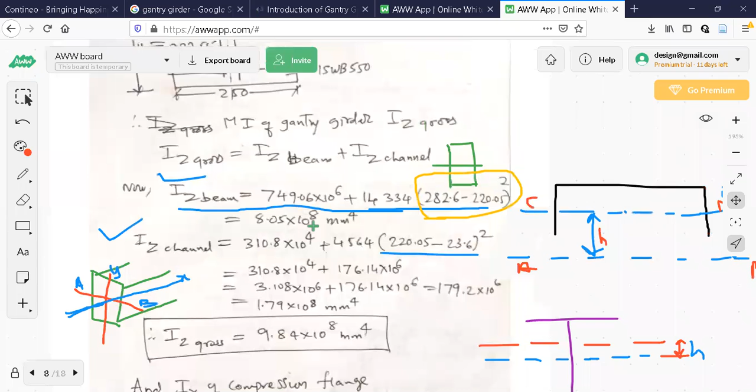This problem, as I told you, is all about geometrical properties initially. I have selected one profile and I am trying to check the strength of this profile, because the maximum bending moment is already calculated. I am checking whether the moment of resistance of this profile is sufficient or not. So for this profile, I have to calculate the moment of resistance, and that value should be more than the maximum bending moment.

In order to find out the moment of resistance, I need IZ values. Once I get IZ, as you know, moment of resistance is equal to sigma into Z, that is, stress into section modulus. You have studied this in strength of materials. What is that? Moment of resistance is equal to stress into section modulus.

So still I have not calculated section modulus. I need IZ to find out section modulus, because section modulus Z is I by Y. I have reached only I now here. Still I'm in I here. Now, IY of the compression flange.

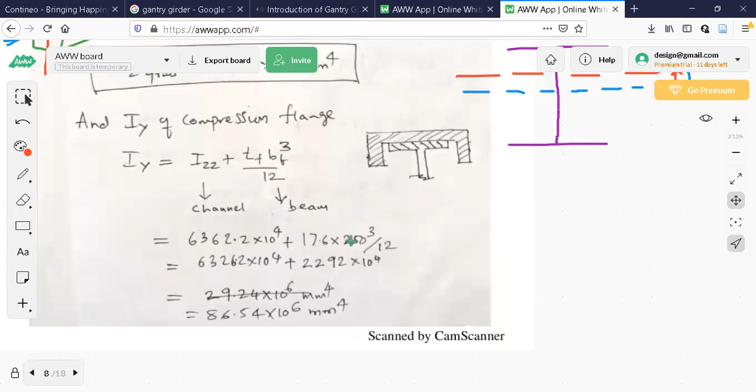I think I'm going to stop because it is too many things I am telling you in one day. But anyway, I'll stop after this. IY of compression flange.

It means the entire channel section is in the compression zone, and the flange of the I section is in the compression zone. This part we are going to neglect, even if it may be there. This vertical part of the I section may be there in the compression zone only, but that we are not going to count or consider. So IY is equal to IZ of channel.

See this, you look at this diagram. Some concentration is required now. You look at this diagram. So I am trying to find out IY of the compression flange. It means about this line. About this line.

Now you can go back and imagine like first year only. There is one section like this, and one rectangle is there. It means effectively there are three rectangles of the channel and one rectangle of the I section. If you want to go back to first year, in that way I'm telling you, you can split it into three rectangles for the channel section and one rectangle for the I section. This white part, whatever is there, that is not considered, it can be neglected.

So for these two, that is the channel and rectangle, I want moment of inertia about this vertical line, YY, that is what is there here. So IY is equal to IZ of the channel section, because the orientation is like this, plus rectangle TF BF cube by 12.

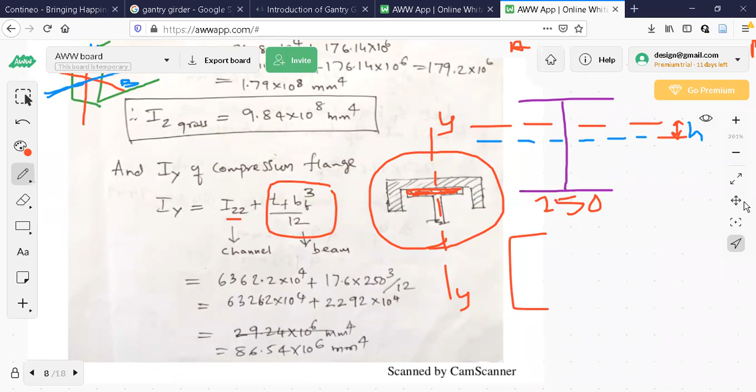So in this way, I'm able to find IY of the compression flange. Why this is required, you will come to know in the next step. Why I need only this part, only this much IY, why it is required. So you remember, this white whatever portion is there, that is the web portion of the I section, is not considered. It may be in the compression zone only, but it is not considered.

So finally, 6362.2 into 10 raised to 4, that is what I am doing here. This I am directly using from the steel tables. Don't be under the impression that it will take a lot of time in the exam, because all these values are available in the steel tables. Here and there you are calculating using a calculator, otherwise most of these values are there in the steel table only. So finally, IY of the compression flange is...